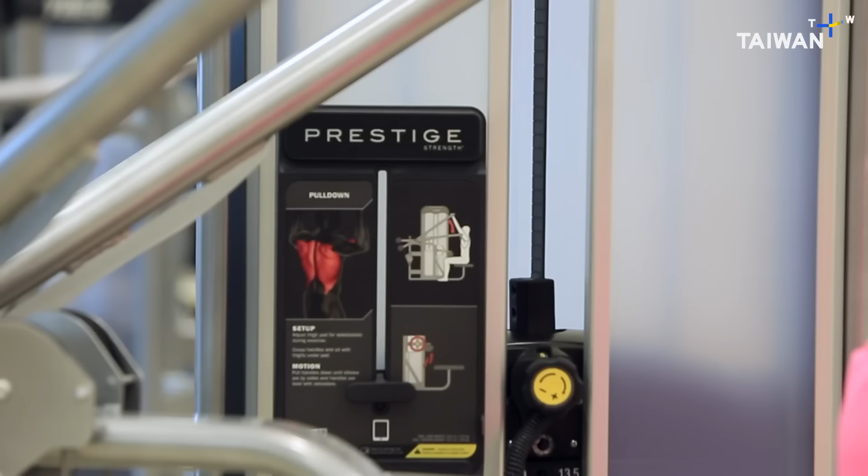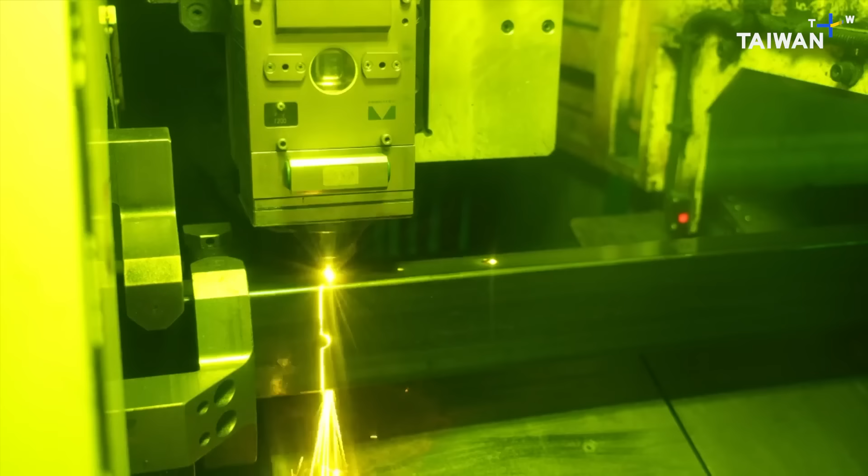forward. 健身是每一个人对自己的一个期望。 And the key to successful self-improvement: ergonomic design, precision assembly, rigorous quality testing.

In a word, craftsmanship. 既然是做健康产业，那我们应该要把健康放在前面。 Fitness is more than a leisure pursuit, and enabling it, encouraging it, is the mission that's been taken to heart by this mega factory.

Downtown San Francisco, California. The gyms are filled with office workers, making the most of their weekend. Everywhere, machines for training. This city has the highest density of gyms in the entire United States. And they're all full of exercise equipment.

Less well known, though, is the fact that over half of all these machines hail from an island on the other side of the world. This is where the buyers for fitness equipment gather. Everything is covered. Gear for cardio and for weight training. Commercial gym machines. Home fitness gear. It's all sold here because this is where it's made, Taiwan.

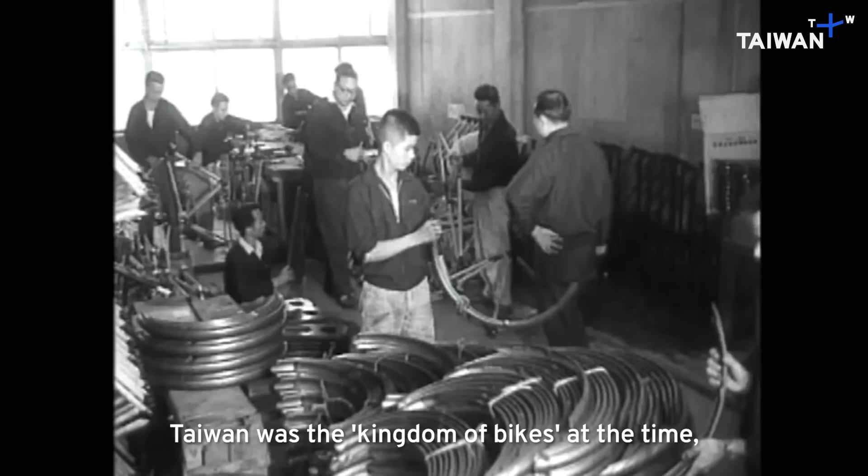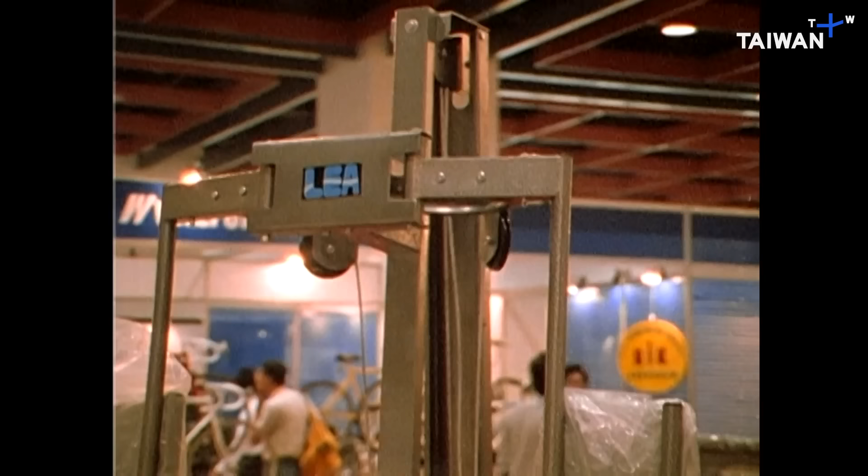As Taiwan has transformed over the last half-century, so has the fitness equipment industry. Once marked by cheap labor and low cost, it's now a high-tech sector, with Taiwanese brands taking center stage. Altogether, some 100 manufacturers generate nearly $2 billion every year.

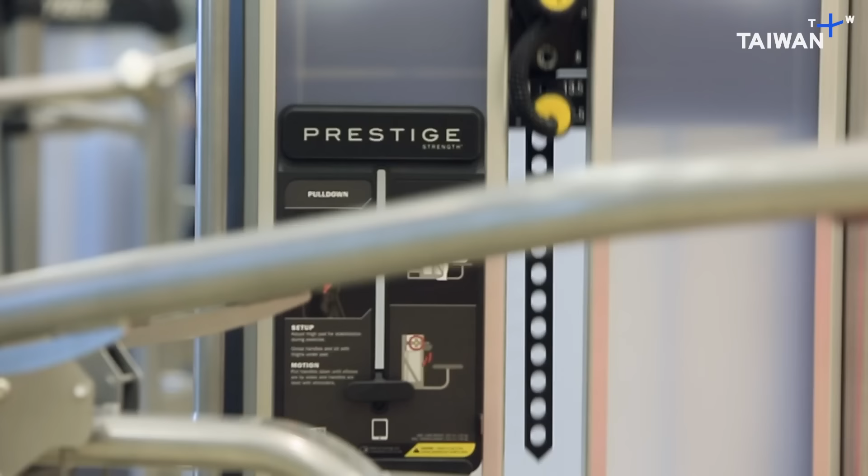Fitness equipment falls into 2 categories. There's weight or resistance training, which uses equipment and free weights to bolster muscle strength and endurance across different muscle groups across the body. Cardio training makes use of treadmills, elliptical machines, and exercise bikes of various kinds, which mostly work the leg muscles to boost the heart rate and respiration through rhythmic leg movements.

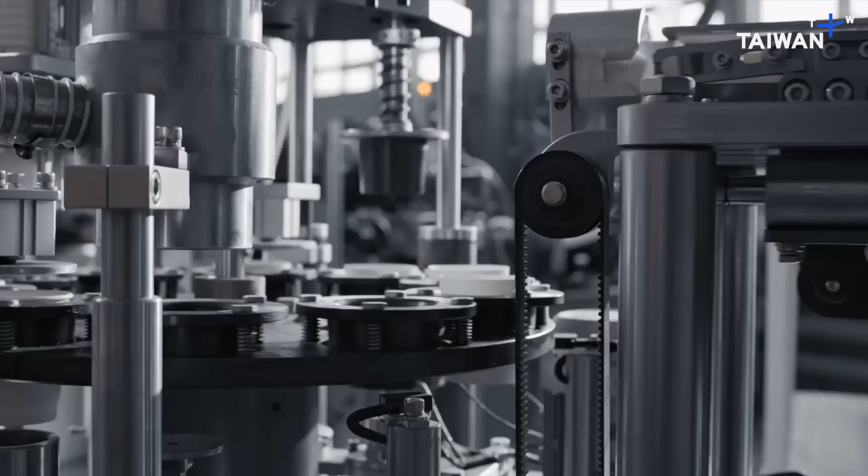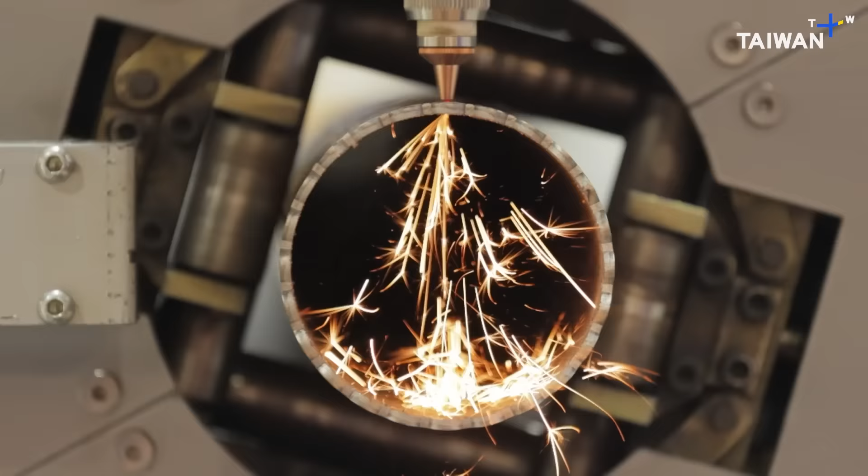In central Taiwan lies the world's densest center for precision machinery. This area alone generates some $30 billion every year. Among all the machine industry and materials production, this area also is home to the bulk of the Taiwanese fitness equipment industry. 就像半导体一样，台湾健身器材这一块在

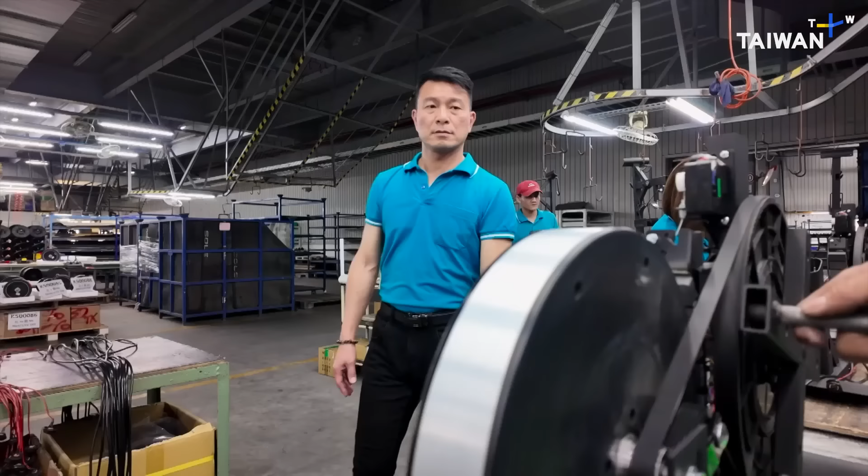Alan Chung has been in the business for over 30 years. The relatively simple assembly process is something he oversees with pride. There's more to it than meets the eye, as precision is everything, and any slip-ups could compromise quality.

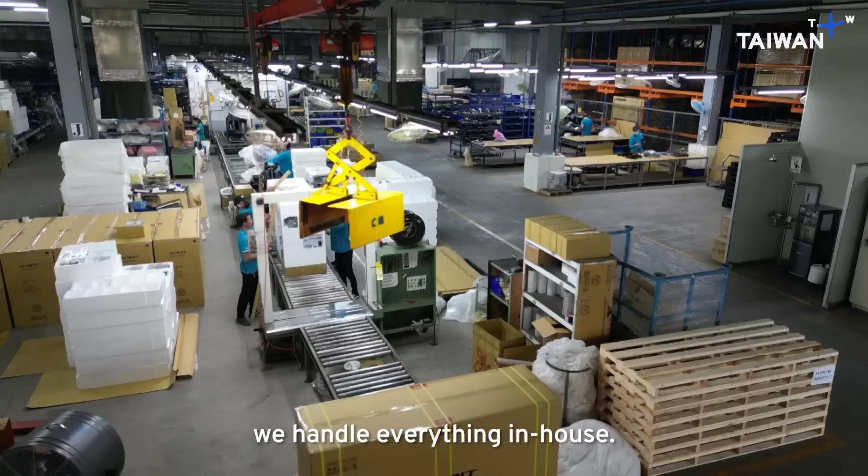The factory at the center of the complex houses 6 production lines, each dedicated to its own product, assembling, inspecting, and packing for shipping. 500 meters away, there's a production facility which manufactures the metal components that feed these production lines. And away from this hard industry, there's a design unit placed in the heart of Taichung City. This is where all the manufacturing begins.

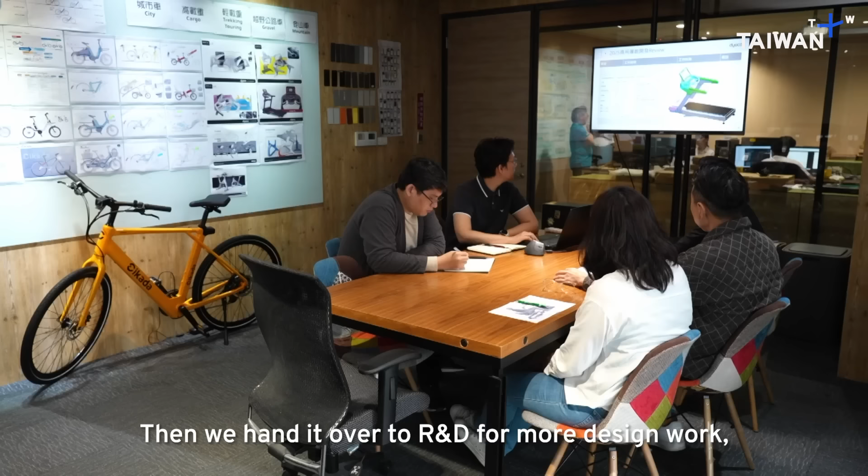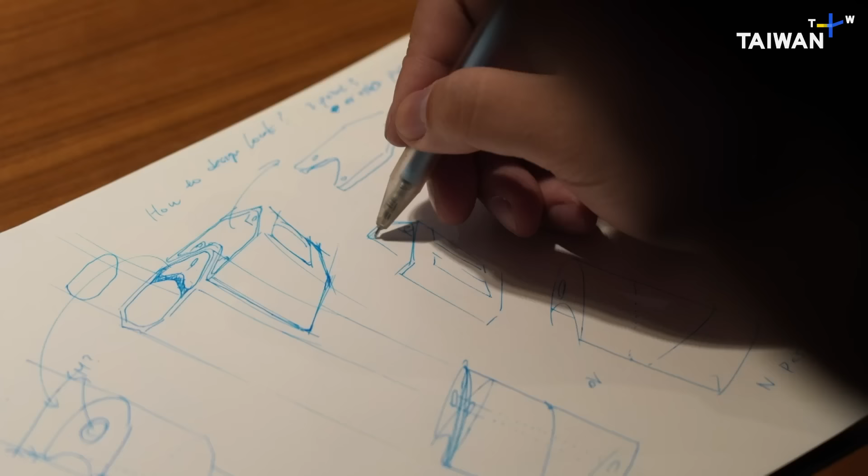There are 2 sides to industrial design here. Working out what consumers want and designing that into a good-looking package. And there's the human factor. How to make it all work for as many people as possible.

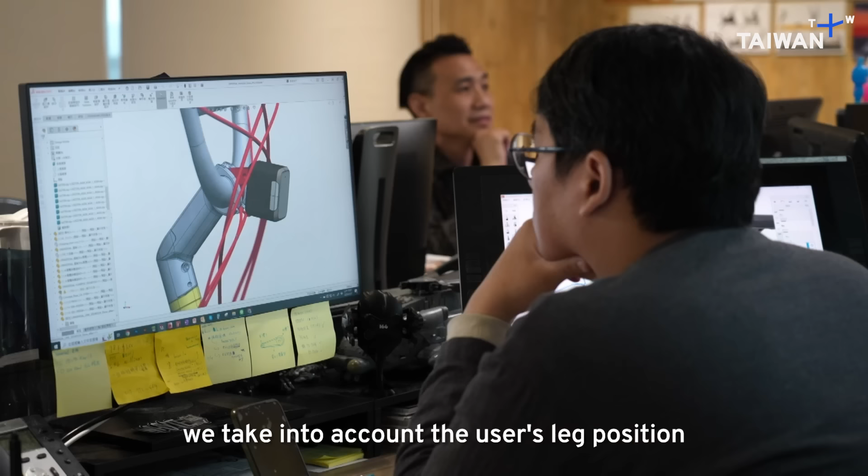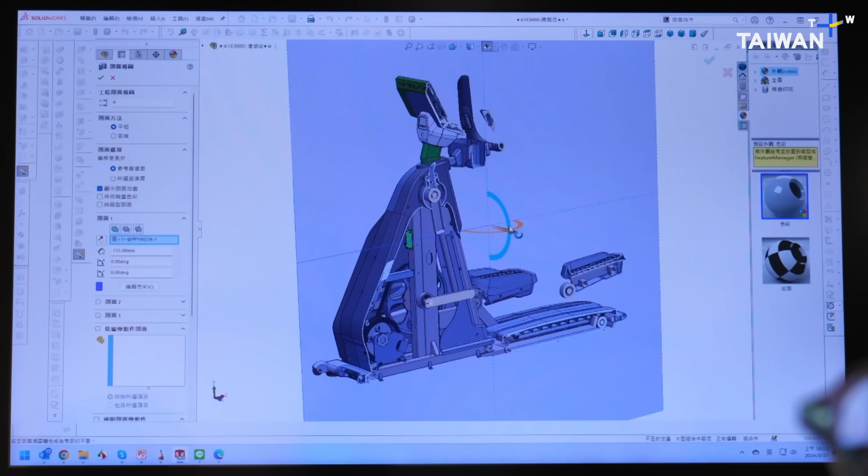It's a scientific approach to design, based on how the human body works. The aim is not just to provide the best workout, but to make sure it works for everyone, whatever their size or shape. And the exercise has to be effective too. Efficiency has to be built in. Not everyone enjoys exercise, and designers have to take that into account.

Running at 10 kilometers per hour on a treadmill for half an hour will typically burn off around 300 calories. But some people find the punishment of that half hour outweighs the health benefits. And they're not wrong. The treadmill was invented for use in prisons.

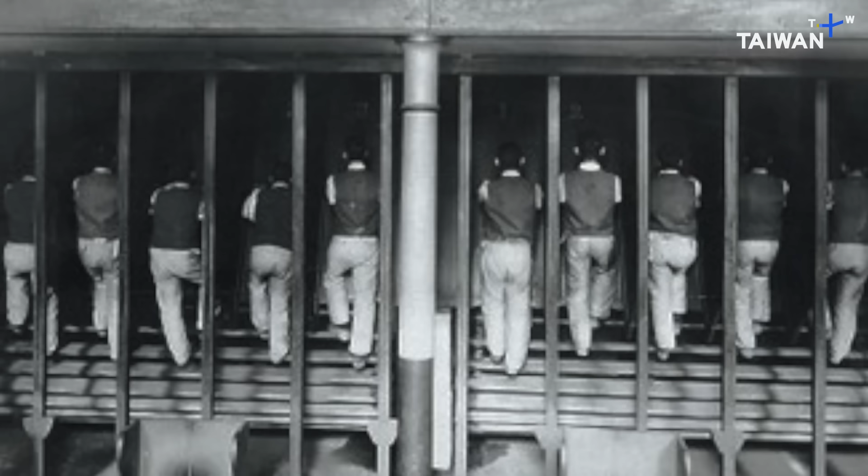Over 200 years ago, an engineer named William Cubitt came up with a roller that prisoners could turn by stepping on it, called the tread wheel. It's a cross between a treadmill and a step machine. The prisoners would step on it for hours at a time, while the power was harnessed for pumping water or grinding grain.

Now that it's optional, and designers have made it much more comfortable and safer to use, the treadmill is perhaps the most popular exercise device in the world. It's almost luxurious, though the user still has to put the work in to see any benefits.

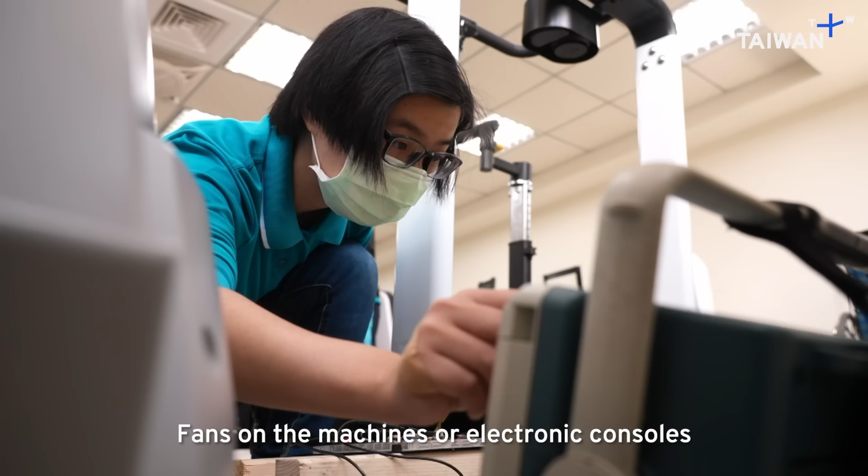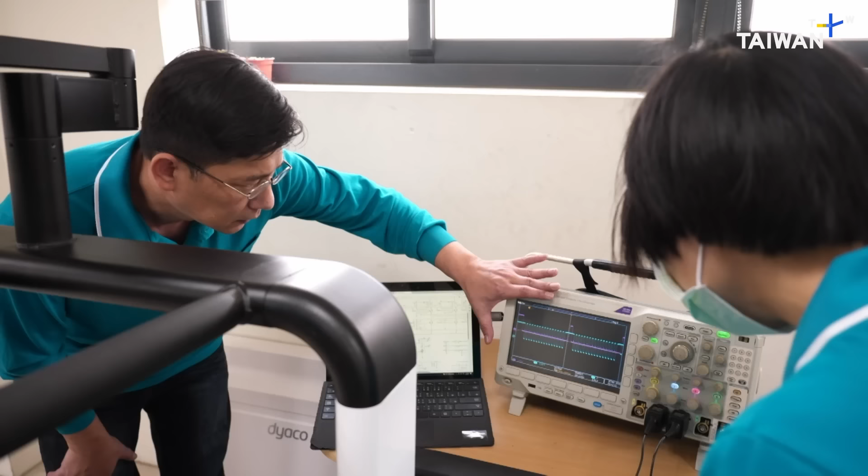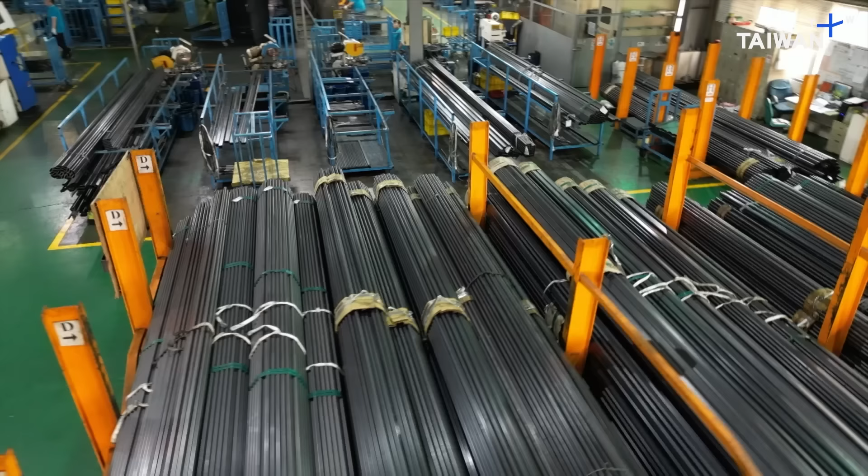Once a design has been through computer testing and several rounds of refinements, and it's been approved for production, it's sent over to the factory where it can start the manufacturing process. The basic raw material is the metal pipe, whether round, square, or flattened off. Here in the component facility, various pipes are welded together to form the components for the assembly line.

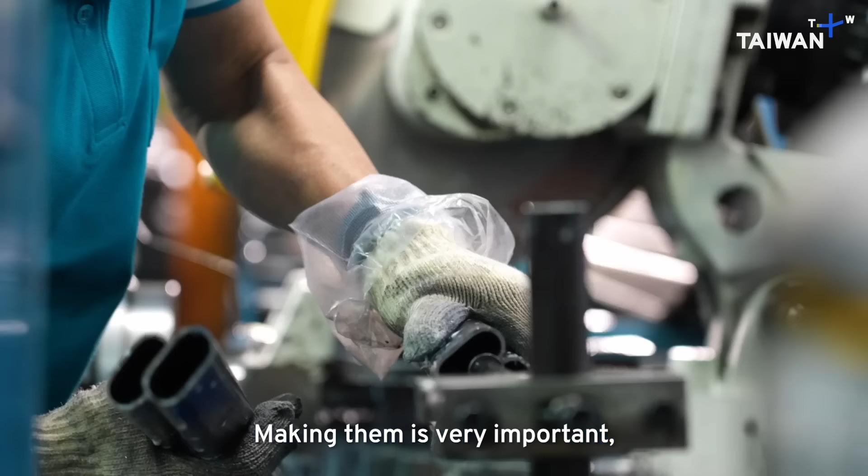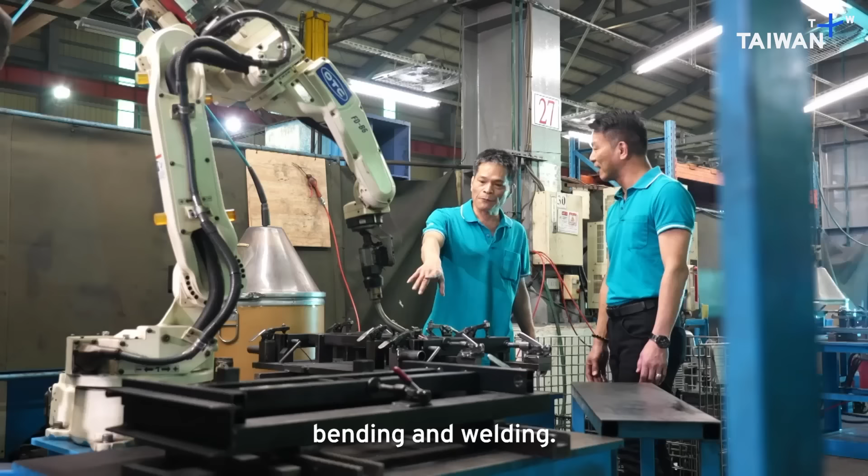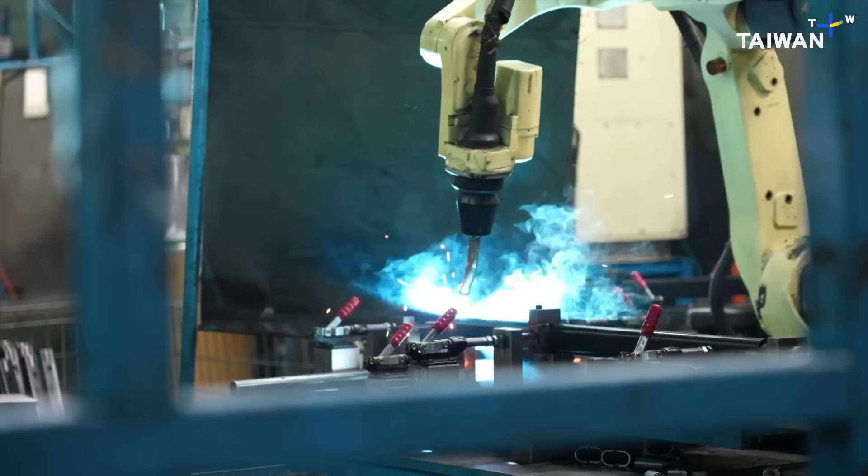To achieve these standards, the process is highly automated, with specialized industrial robots taking over many of the tasks, particularly welding, to ensure consistency. The pipes are cut to the exact length specified using laser cutters. These machines can deal with the toughest metal, burning through it along a pre-programmed path. Compressed air blows away the evaporated metal, and the cut edges are smooth, even, and precise to a fraction of a millimeter.

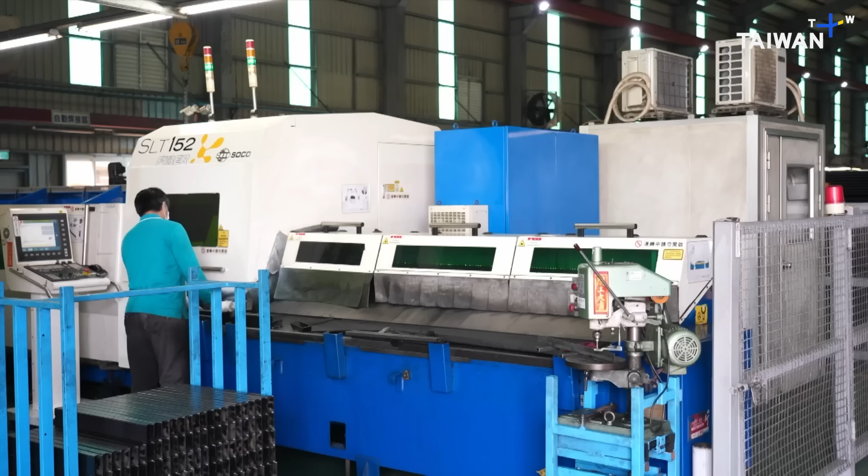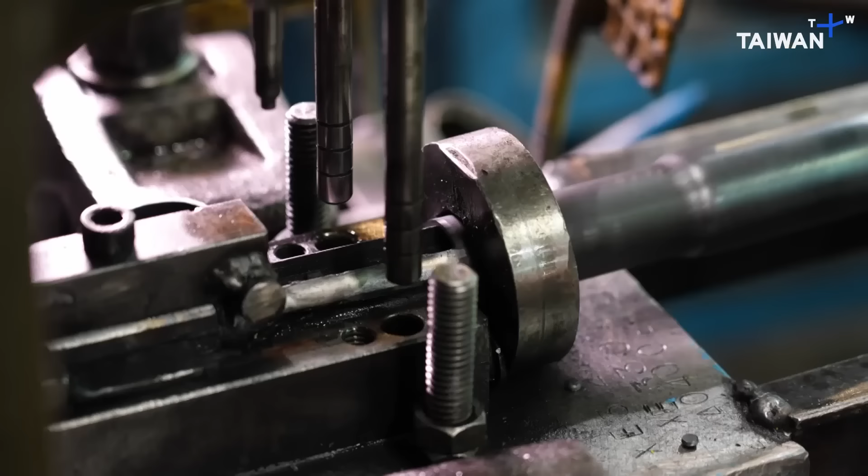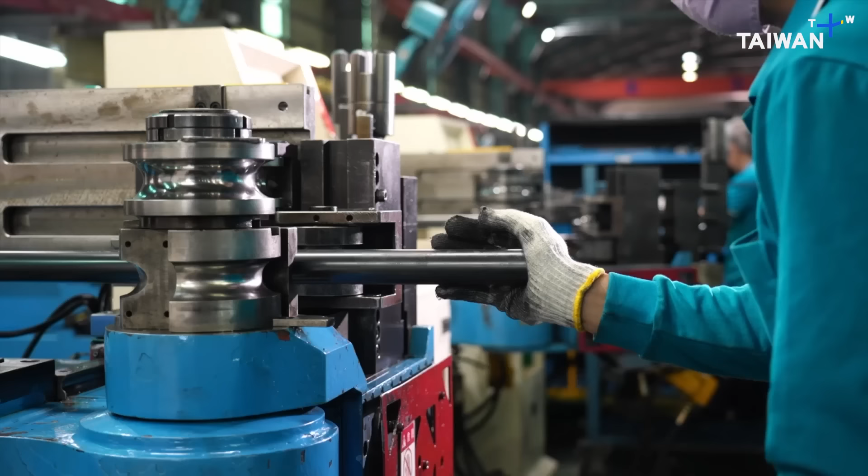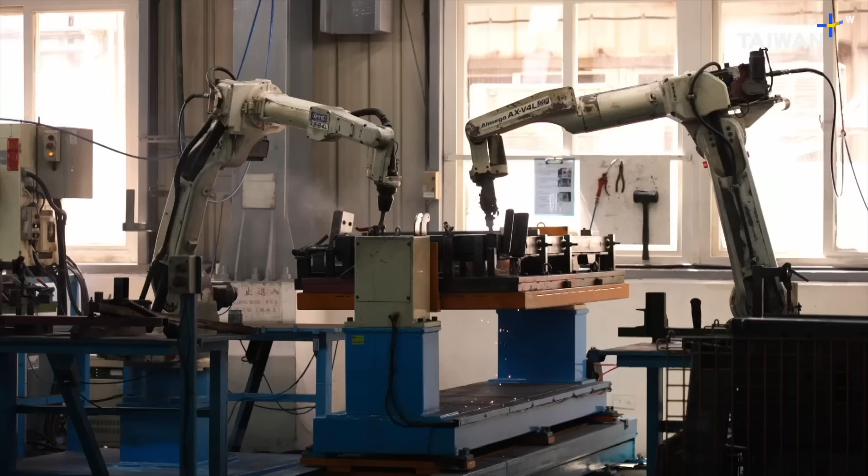The pipes then have holes punched in them, where they will be joined together with bolts. Most need to be shaped as well, bent by computer-controlled machines to precise angles so they can fit together. The machines, however, still need to be fed by hand. Finally, it's the turn of those robotic welders. The components are now ready to come over to the assembly lines.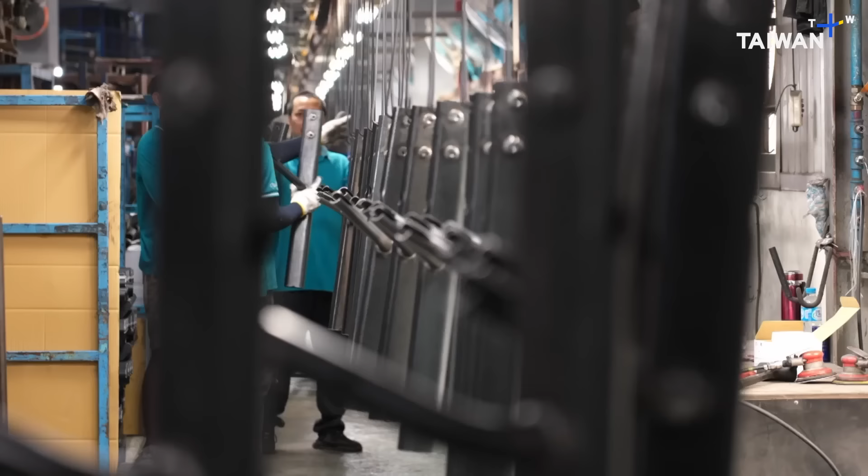Here in the loading bays, the newly arrived components are hooked onto an overhead conveyor that will transport them as much as a kilometer through the factory.

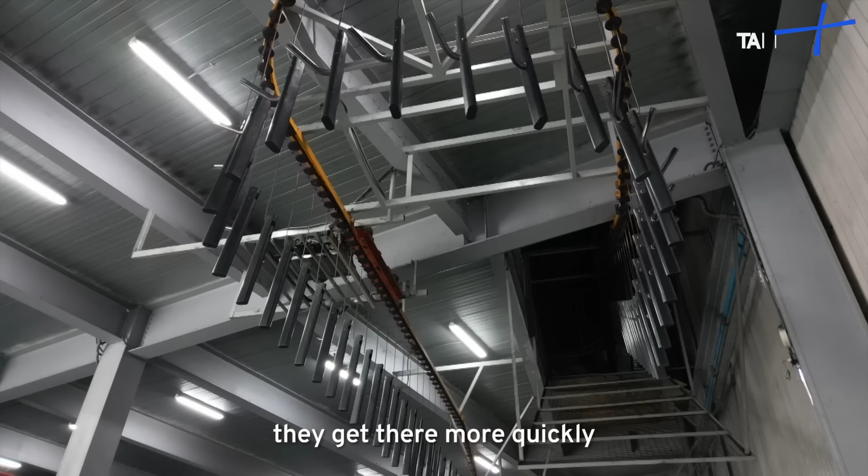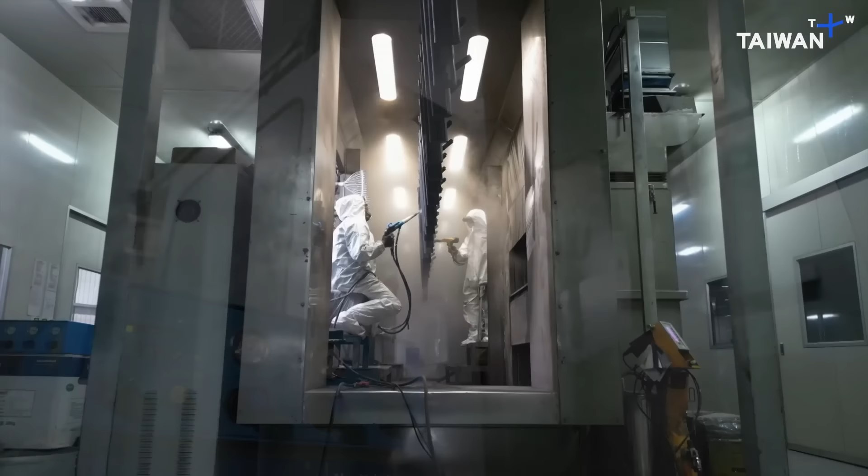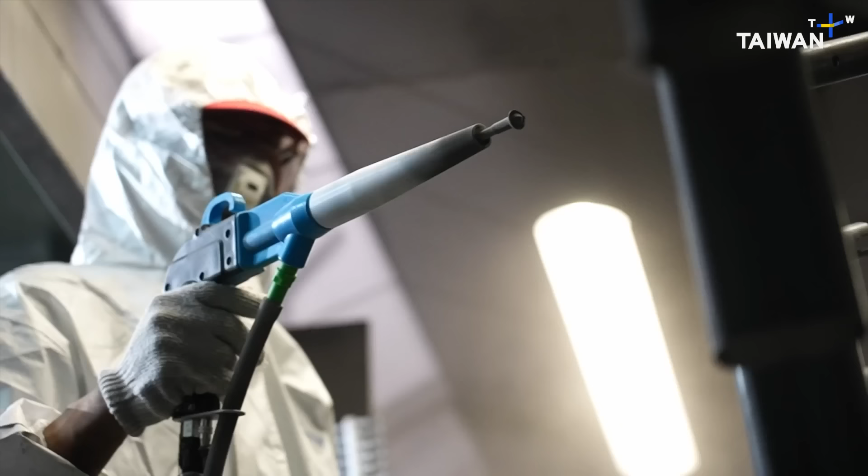Before anything else, the components have to be protected from corrosion, and it doesn't hurt that it makes them look good as well. To do this, workers use spray guns to apply powder particles directly onto the bare metal, making sure it gets into all the corners and grooves. Once this is done, the components continue on their path through a series of automatic sprays that ensure everything is evenly covered with powder.

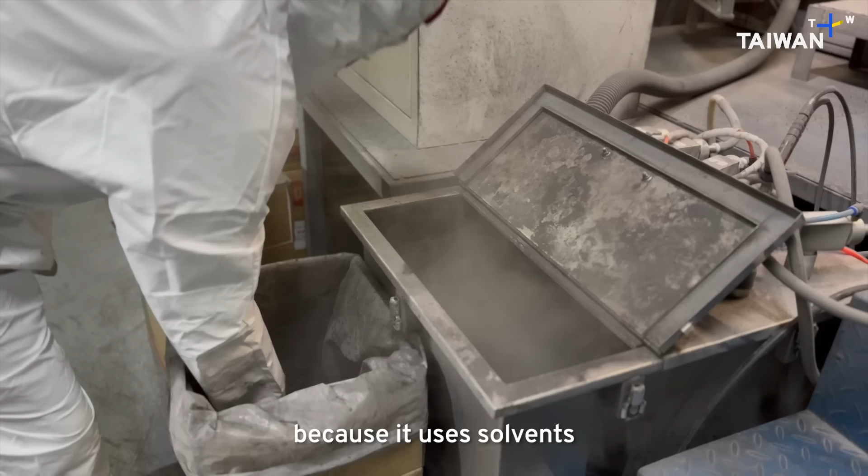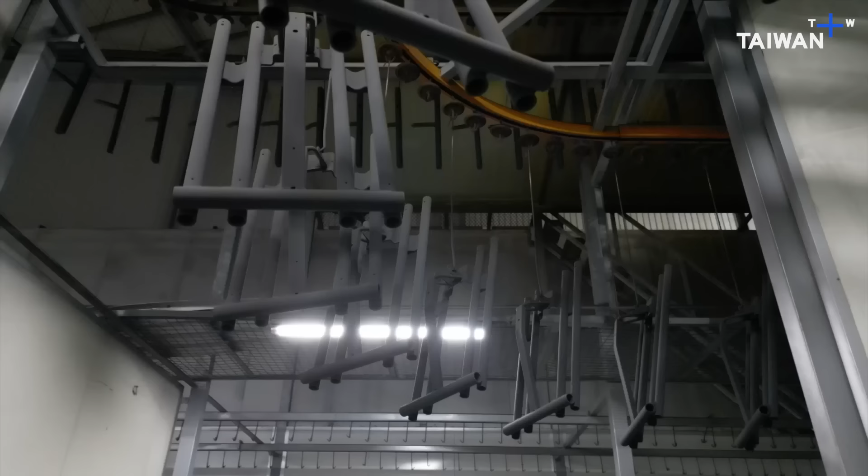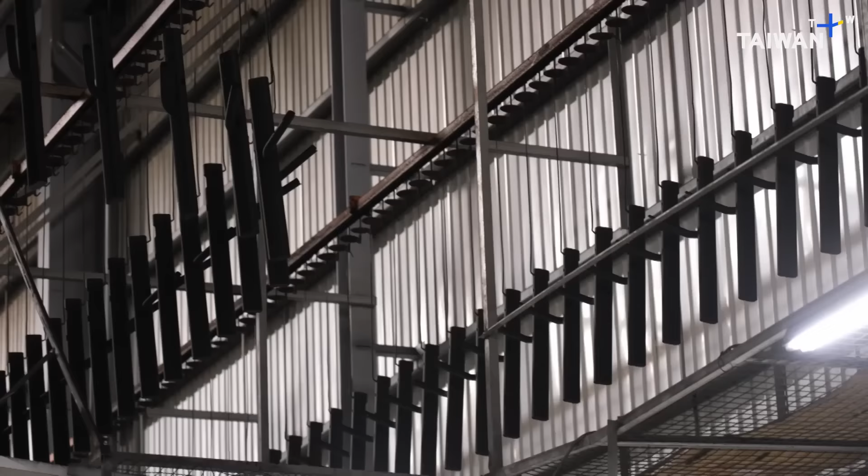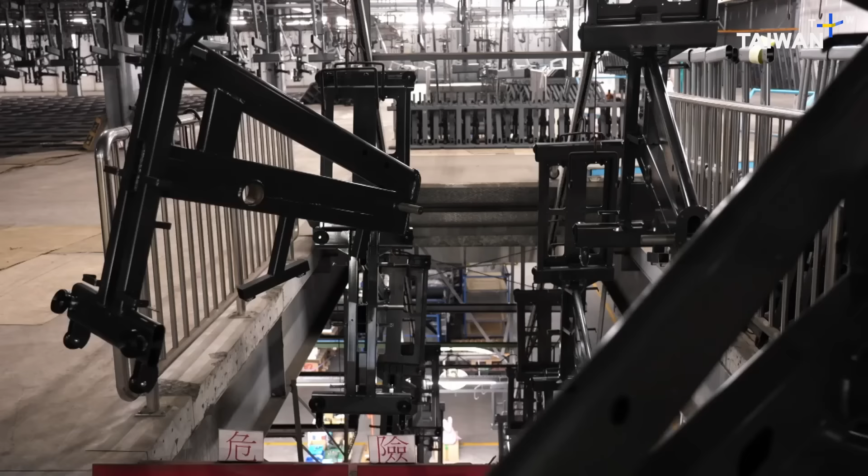The powder needs to be cured to fasten it to the metal permanently. To do this, the components are brought into a special oven running at 220 degrees Celsius. The powder polymerizes, smoothing out and bonding to the metal. Every piece emerges with a sturdy, hard-wearing surface. Now it's time to come together. The components are ready for assembly.

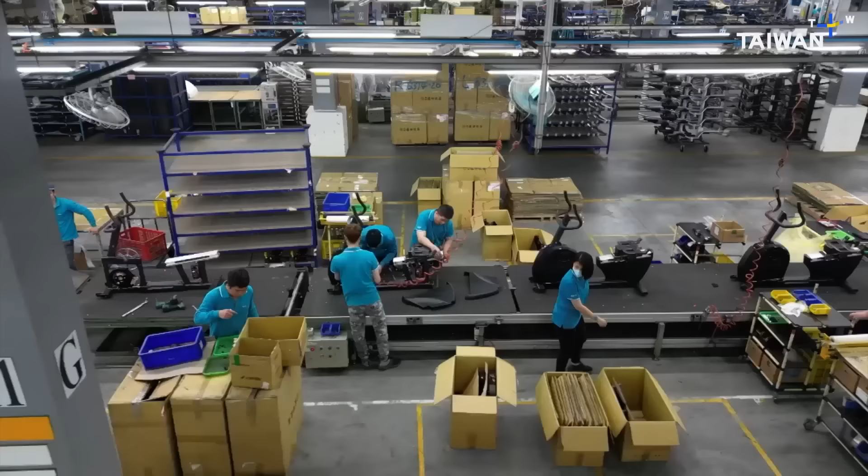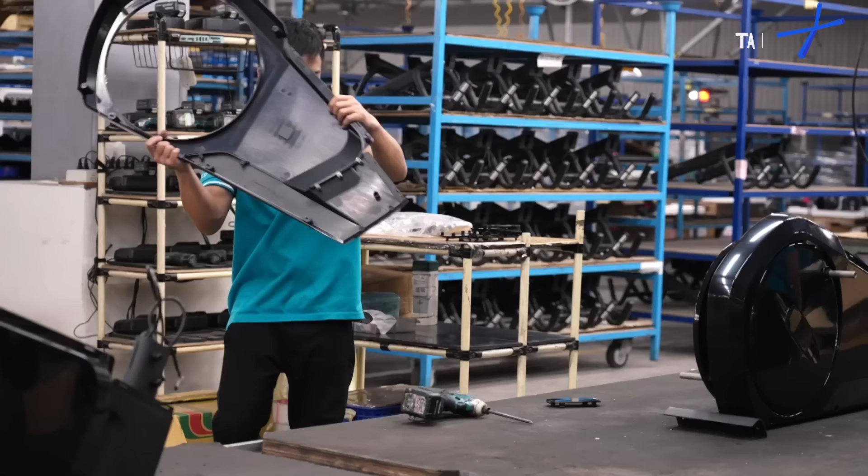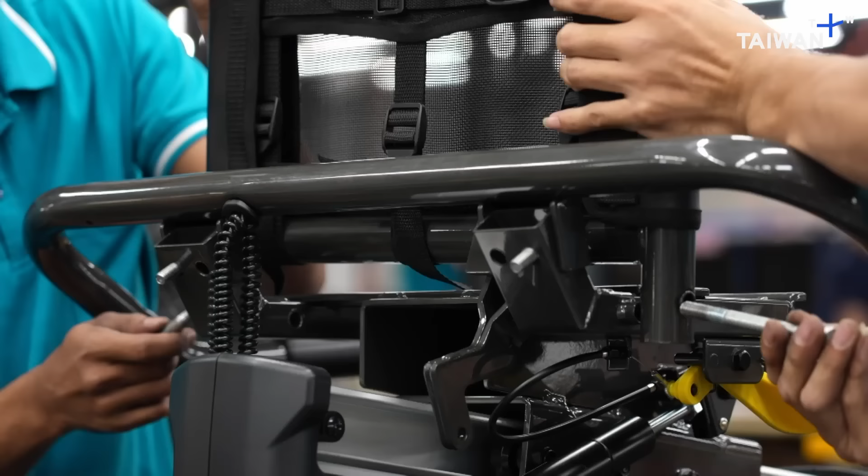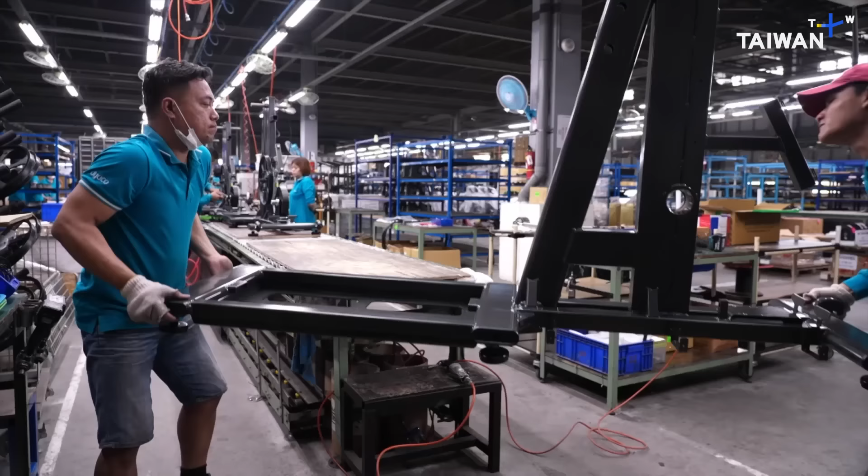The next production line is relatively short, just 200 meters. But it packs in 3 working areas: parts assembly, quality control, and finally, packaging. The process is part automated, but there's still a need for 50 skilled workers. Together, they can produce up to 300 units a day. Treadmills, exercise bikes, whatever is required. Today, the order to be fulfilled is for 150 elliptical machines.

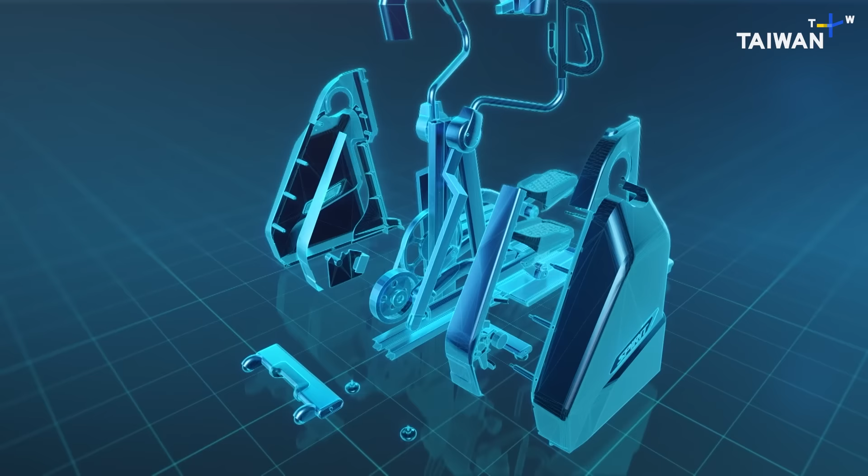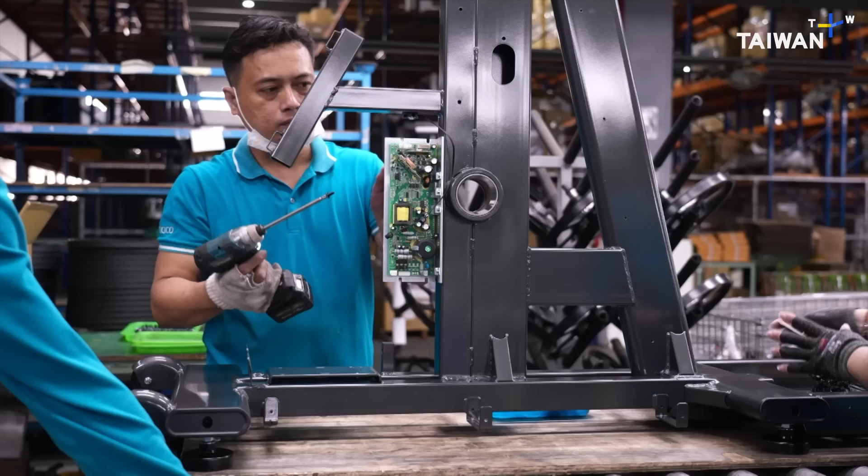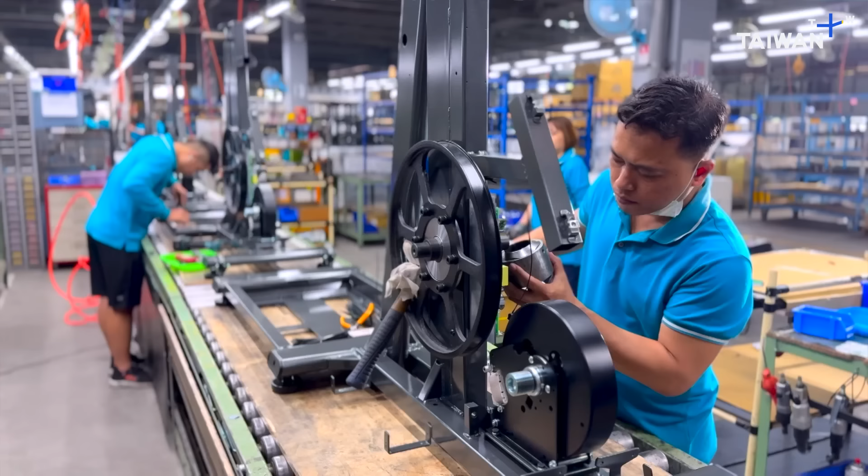The elliptical machine is used for cardio training. It allows the user to move their arms and legs to simulate the natural motion of running or walking. The elliptical movements, which give rise to the machine's name, reduce impact stress. The user's movement spins a 13-kilogram flywheel at the heart of the machine. A pulley system controls the resistance of the spinning flywheel and allows the intensity of the workout to be changed. So, like all the machines here, it has to be manufactured within strict tolerances.

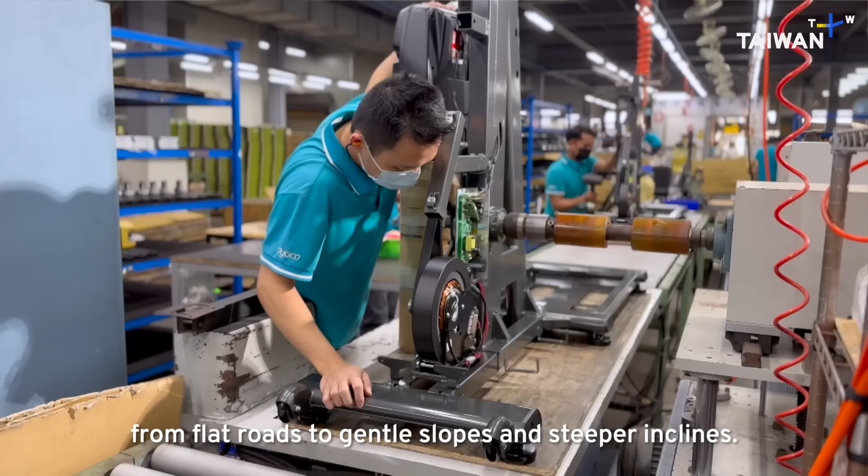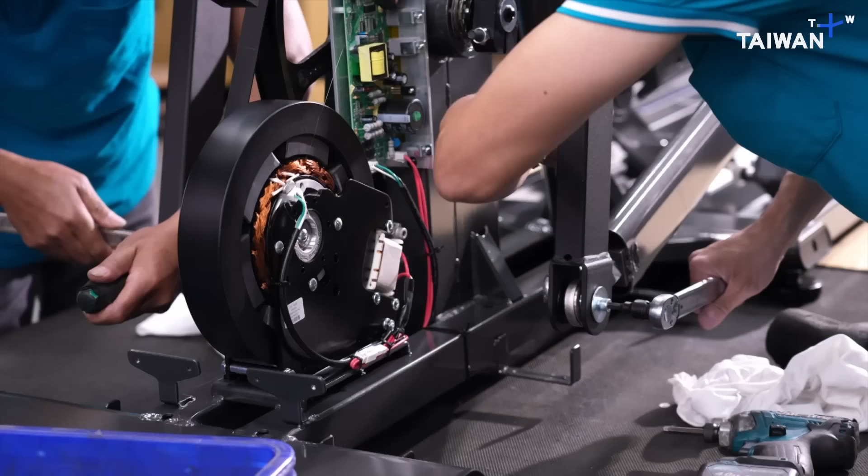The user puts in most of their effort on the pedals. With no actual ground contact, the joints are protected from the jolting of a real run. The pedals themselves are sloped slightly inwards, just 3 degrees. Studies have shown this allows the body to keep a natural upright position during exercise and helps reduce unnecessary fatigue.

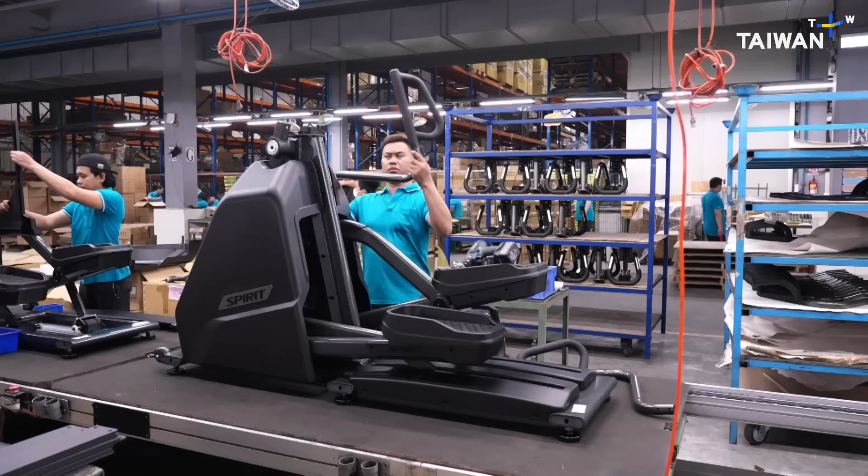In the final stage, handlebars and an electronic interface are added. The machine now weighs nearly 200 kilograms. Although it's fully assembled, it's not quite ready to be sent out. It has to pass a quality check and have any faults put right.

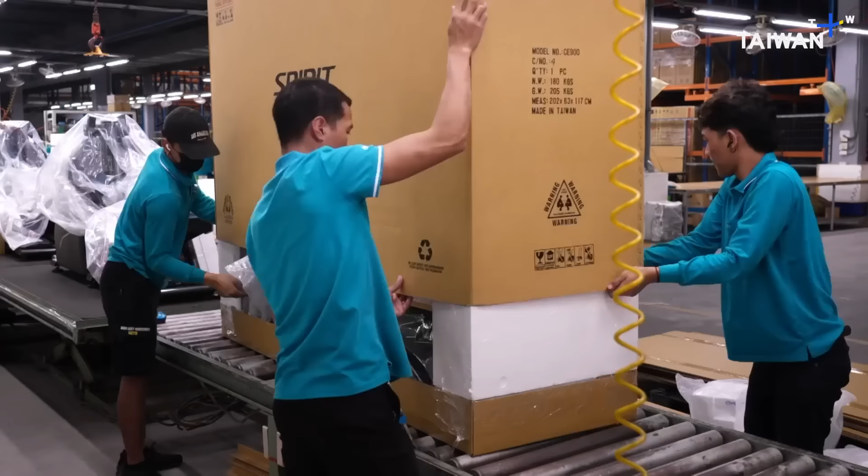Once the machine has passed all its inspections, it can be packed up and sent off. Even that has to be thought through well. A machine this heavy and awkwardly shaped will need sturdy packaging to avoid damage. All the more so, given that it might be traveling to the other side of the world. The machines that are shipped out have all been tested to make sure they're working properly.

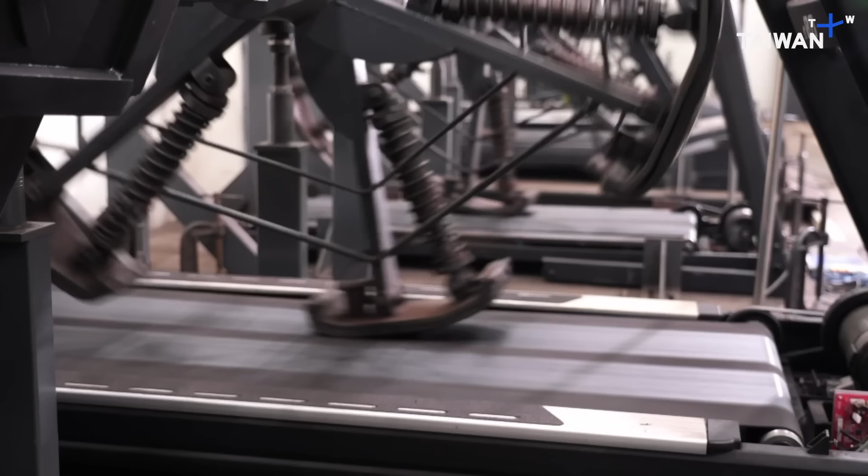But will this be the case long term? Are all the belts tight after a year of use? Have any screws come loose? Is the motor still running well? The way to find out: endurance testing.

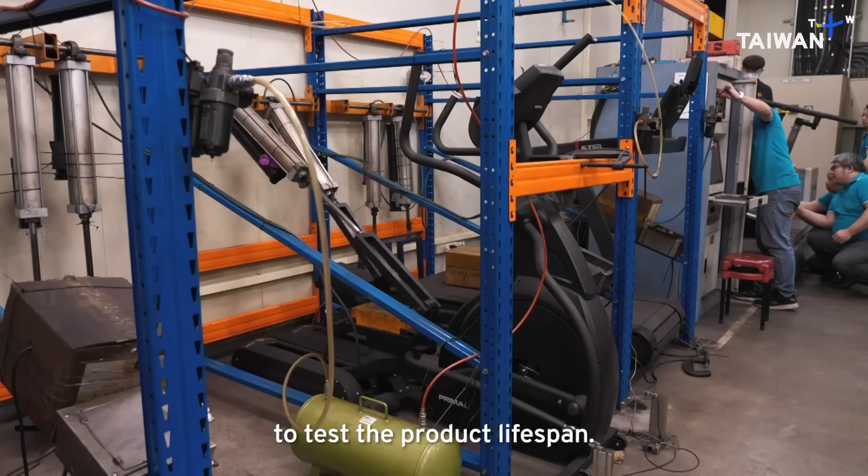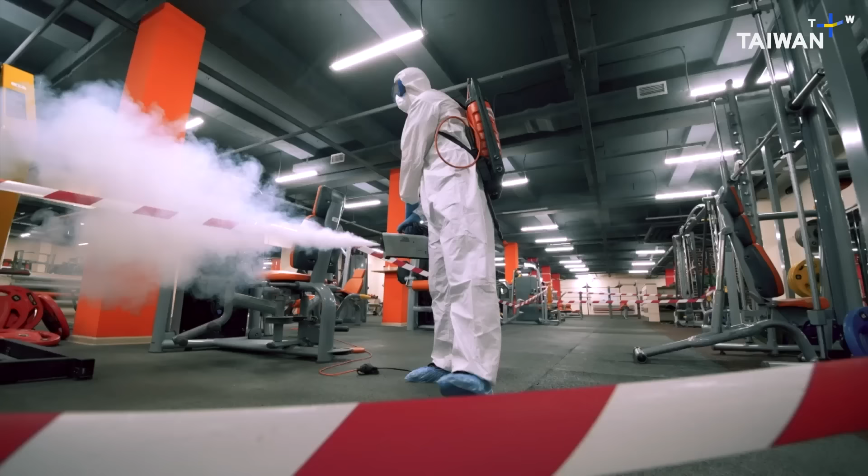When the COVID pandemic hit in 2020, most indoor activities became impossible. Gyms and fitness centers across the world closed their doors, and many have not reopened since.

But people still want to be fit. And so home workouts and interactive smart fitness have taken over. Equipment hardware has been supplemented by software packages designed to engage the user, replacing the let's-get-it-done atmosphere of the gym.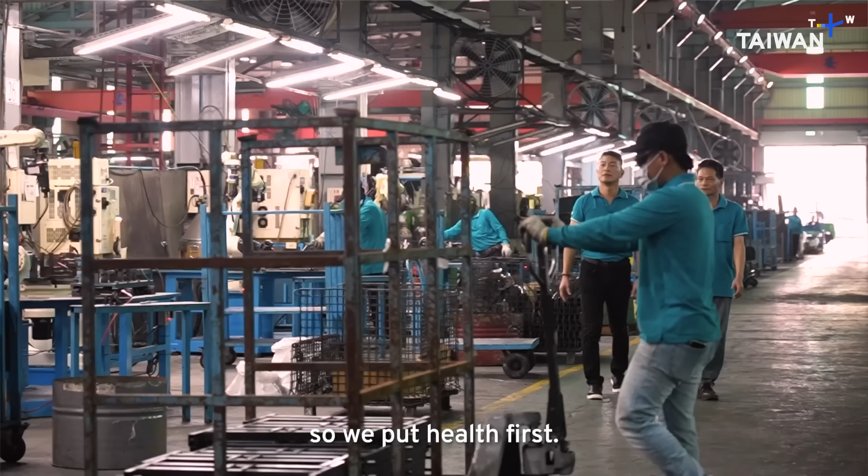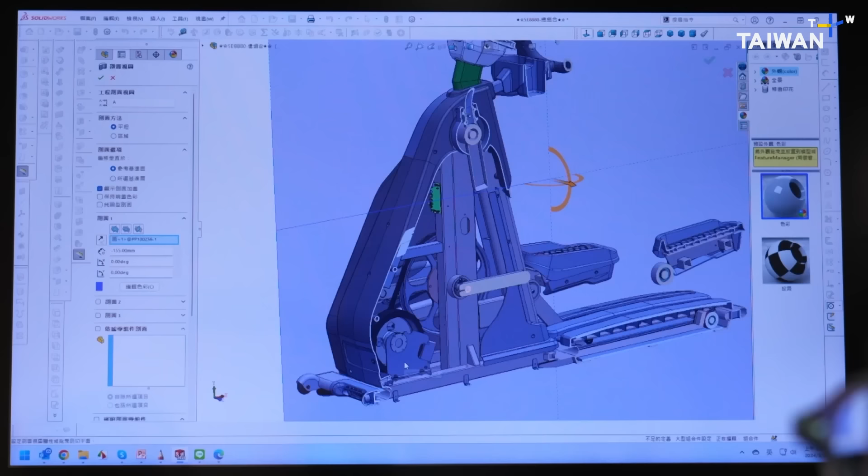Regular exercise upholds the essential equilibrium of our bodies, a cornerstone of universal health awareness. And fitness machines have a significant role in this. Careful design and quality manufacturing mean that they can be more effective and safer. At the same time, care has to be taken to ensure that a workout on an exercise machine is entertaining in its own right.

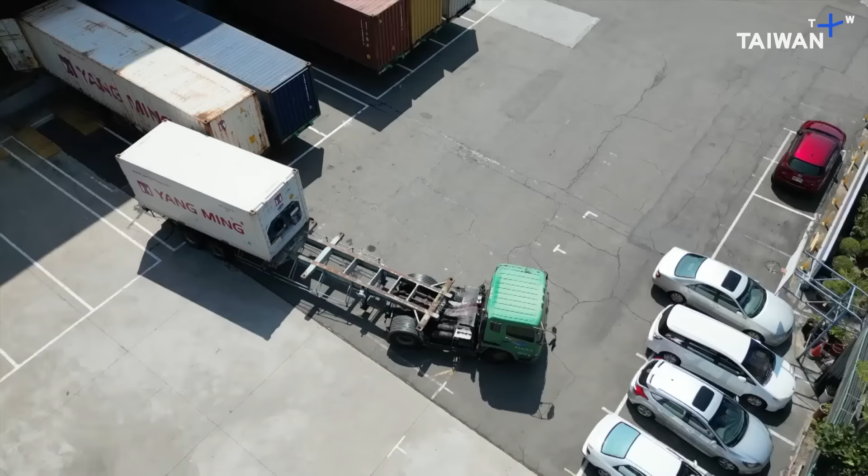These Taiwanese factories strive to transform monotonous exercise into a dynamic and efficient experience. Ultimately, they will no longer be just a fabrication center, but a place where an entire lifestyle takes shape.